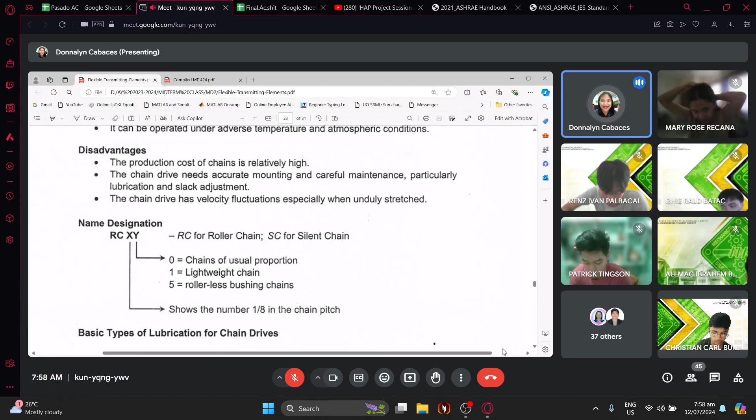So, yung first digit, kung 2 digit lang sila, or first 2 digits, kung 3 digits, refers to the number of 1/8 inch in the pitch, and 0, 1, 5 refers to chains of usual proportion, lightweight chain, rollerless bushing chain, respectively. So, ayan po yung ating roller chain designation.

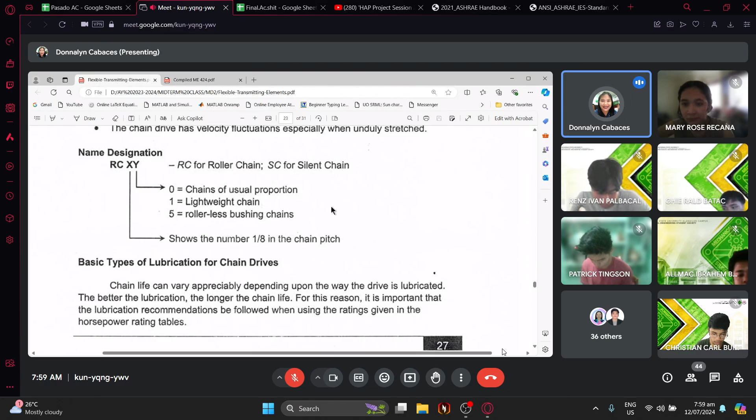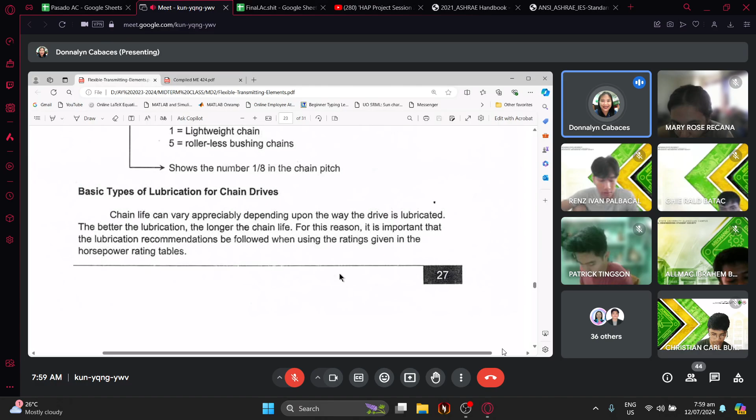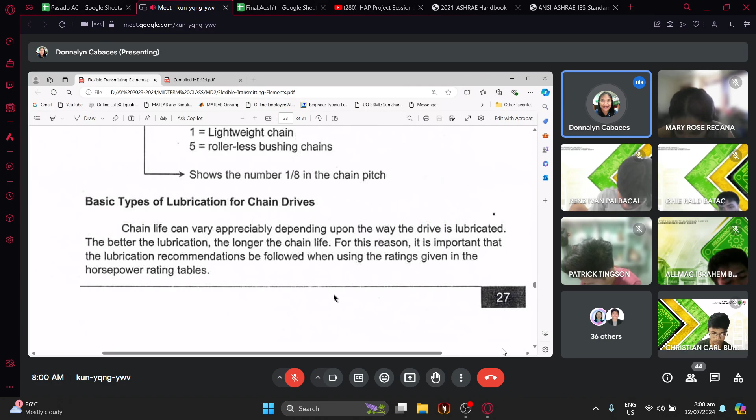Basic types of lubrication. So, minention natin kanina yung type A, type B, type C. Chain life can vary appreciably depending upon the way the drive is lubricated. The better the lubrication, the longer the chain life. So for this reason, it is important that lubrication recommendations be followed when using the ratings given in the horsepower rating tables. Now, ito yung mga type ng lubrication, yung kanilang explanation.

So yung type A again is manual or drip lubrication. Huwag basta lang type A ang ilalagay, type B, type C. Ilagay nyo kung ano ba yung tawag. So for manual lubrication, oil is applied copiously with a brush or spout cans at least once every 8 hours of operation. Volume and frequency should be sufficient to prevent overheating of the chain or discoloration in the chain joints. So again, using brush or spout cans.

For drip lubrication naman, from the word drip, so oil drops are directed between the link plate edges from a drip lubricator. The volume and frequency should be sufficient to prevent discoloration of lubricant in the chain joints. Precaution must be taken against misdirection of the drops by windage. Now, since dripping siya, sabi dito, precaution must be taken against misdirection. Baka mamaya, hindi doon sa dapat nating paglagyan siya mag-drip. No? By windage.

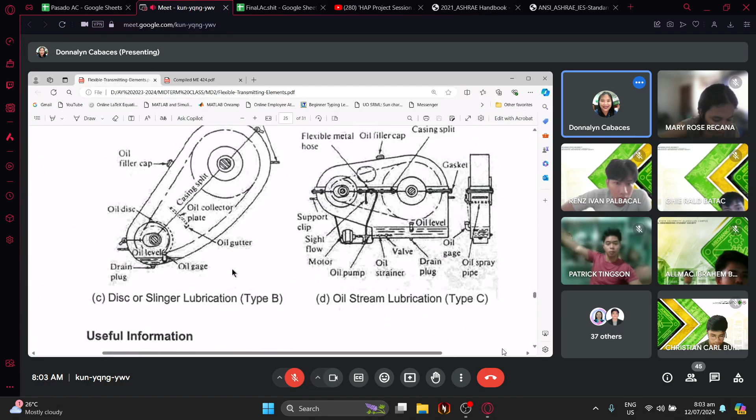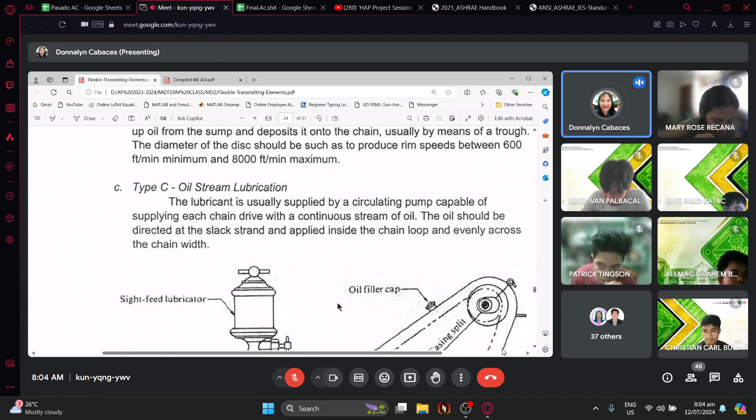And the third one is yung ating oil stream lubrication. The lubricant is usually supplied by a circulating pump capable of supplying each chain drive with a continuous stream of oil. The oil should be directed at the slack strand and applied inside the chain loop and evenly across the chain width. So, yun naman yung oil stream.

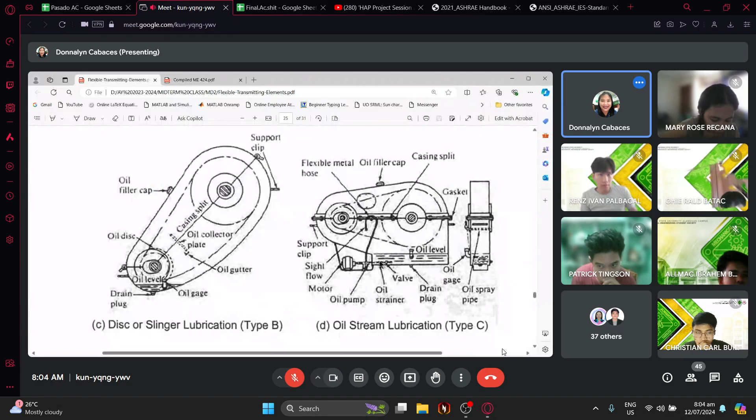Okay, so yun ang tatlong type ng lubrication. Type A, Type B, and Type C lubrication.

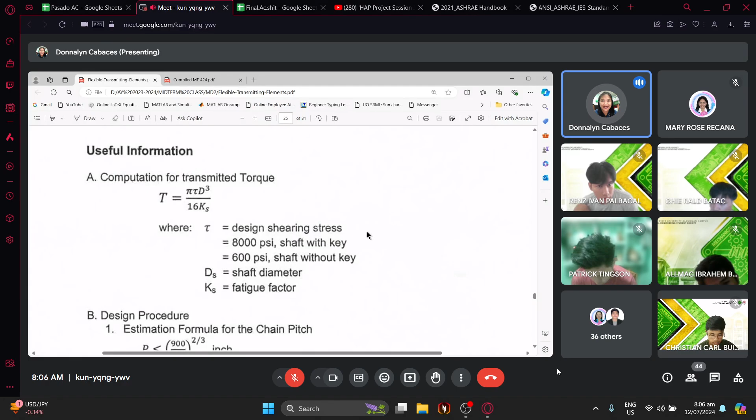Now take note that your design shearing stress, if not given in the problem, you may make use of 8,000 psi for shaft with key. Shaft without key, this is 6,000, not 8,000, not 600. Kinorek mo yun? 6,000 yun. I-take note nyo ha, ito ay 6,000 kapag without key. And then DS is the shaft diameter, and KS is the fatigue factor.

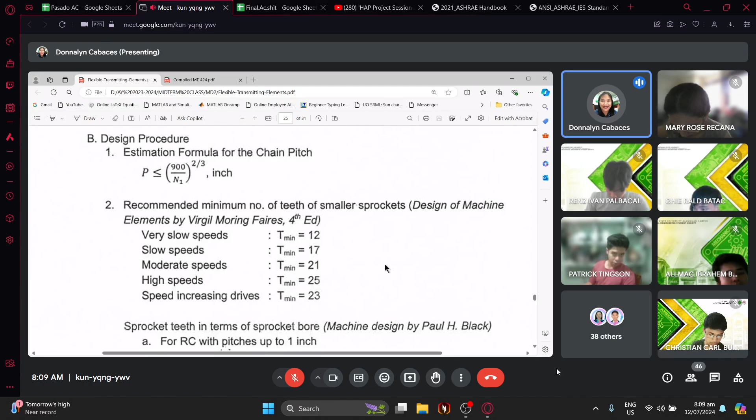These are actually recommended minimum number of teeth according to the book Design of Machine Elements authored by Virgil Moring Faires. So for very low speed, you can make use of 12, slow speed 17, moderate speed 21, high speeds 25, speed increasing drives 23. That is the minimum number of teeth of the smaller sprocket. Please take note of this, take a screenshot at inyong sauluhin.

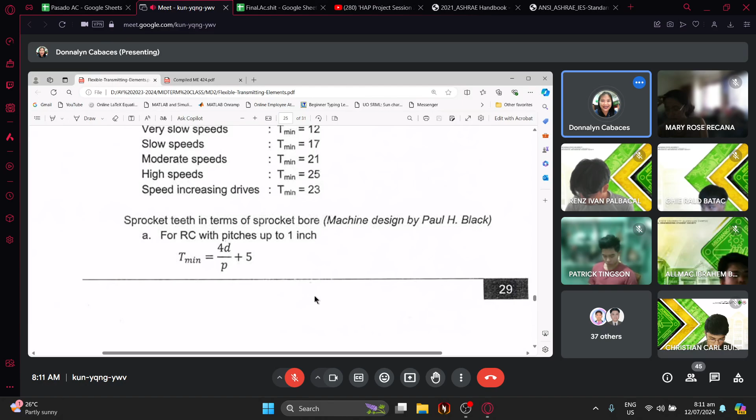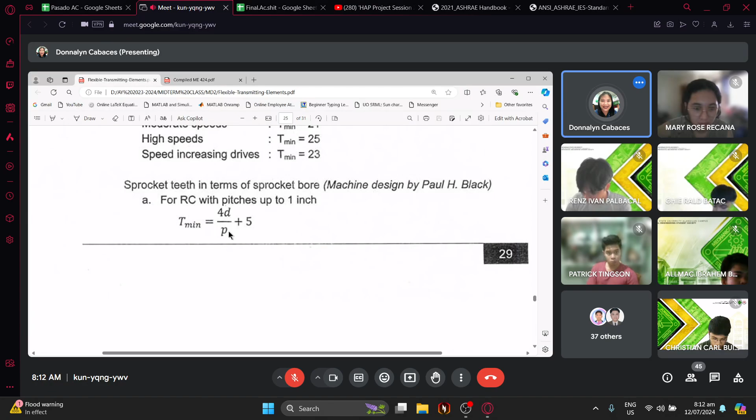For RC with pitches 1 and 1/4 to 2 and 1/2, the formula is 4D over P plus 4. Kanina ay plus 5, doon lang naman magkakaiba sa naka-plus. 4D over P plus 5 for that one, and this is 4D over P plus 4. And for silent chains or SC instead of roller chain, you have 4D over P plus 6.

And for the larger sprocket, in order for us to determine the number of teeth, the minimum number of teeth, dapat daw ay odd number. So for the larger sprocket, hindi gagamitin lang natin yung ating relation ng number of teeth at saka ng RPM. Ang T dito ay number of teeth at ang N natin ay speed o yung RPM. So T1 N1 is equal to T2 N2. From that equation, you can find the number of teeth of the gear or the driven speed.

Number 3, computation of pitch diameter and outside diameter. Pitch diameter, ito nakita na natin kanina, sa kabila ay over N lang ito, but again it refers to the number of teeth. So kung ayaw nyong malito, do not memorize the letter, memorize yung number of teeth. So DP is the pitch diameter, sorry, P is the pitch, DP is pitch diameter. P is pitch divided by sine of 180 divided by the number of teeth.

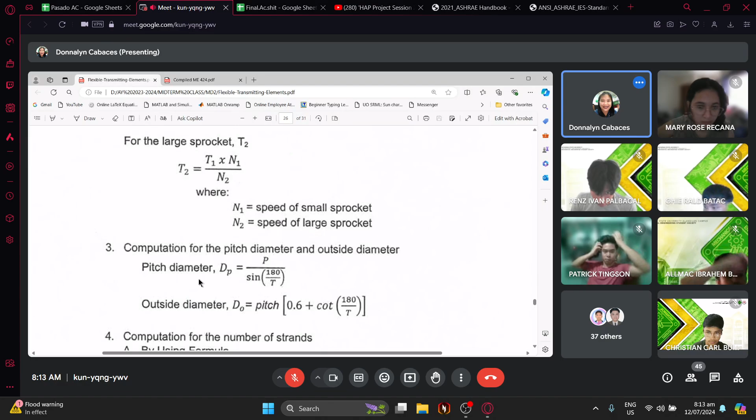Next, computation for the number of strands. Kagaya din ito ng formula natin dati sa belt. Formula or procedure number 5: number of strands is design horsepower over HP per strand. Yun ang ating formula, diba? Pareho din lang, ang design HP ay transmitted HP times the service factor.

Now, the horsepower per strand, for link plate fatigue, you have this empirical formula: 0.004 times the number of teeth raised to 1.08 times the RPM raised to 0.9 times P raised to 3 minus 0.07 P, wherein P is the pitch. So, memorize this formula for link plate fatigue.

For roller bushing impact, you have this formula for the horsepower per strand: KR is equal to 100 T1 over N1 raised to 1.5 times pitch raised to 0.8, wherein the value of KR is equal to 29 for chain numbers 25 and 35. KR is 3.4 for chain number 41, and KR is 17 for chain number 40 to 240, except yung ating 41, kasi may nakadesignate sa kanya sa chain number 41.

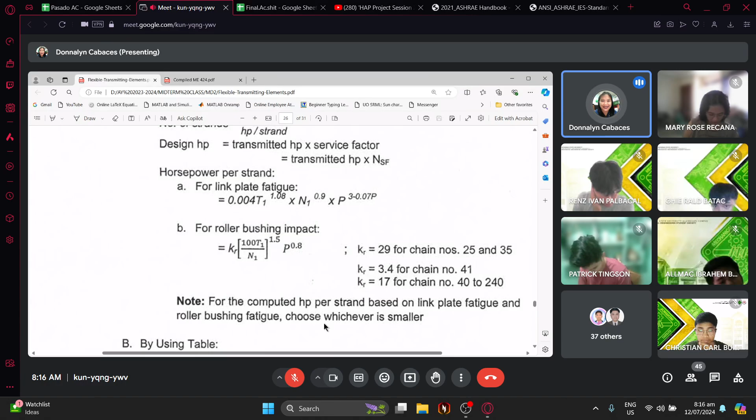For the computed HP per strand based on link plate fatigue and roller bushing fatigue, choose whichever is smaller. Now, that is using yung ating formula ng horsepower per strand, kasi nga hindi natin alam kung ano yung roller chain number, so hindi tayo pwedeng tumingin doon sa table na pinakita natin kanina.

Now, by using table, your HP per strand is the design HP over the multiple strand factor. Alin yung multiple strand factor? Yan yung 1.7 kung 2 strands, 2.5 kung 3 strands, at 3.3 kung 4 strands. Note, assume different number of strands so that the horsepower rating on ACA tables, ACA is yung sa manufacturer, is greater than the computed HP per strand. Sabi, dapat daw yung horsepower rating natin sa table ay mas malaki kaysa sa doon sa makukompute natin.

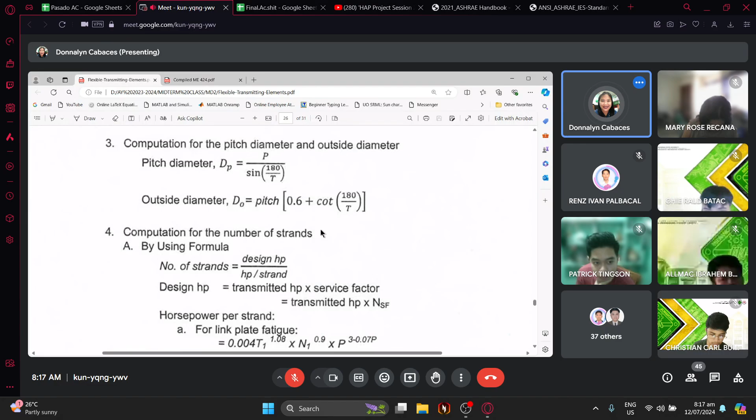Okay, so kailangan natin ding i-compare siya sa table. Paano nga ho natin i-compare? Hindi nga ho natin alam. Hindi din sa number 1, makukuha natin ang pitch doon sa ating formula.

Yung P ay equal to 900 over N1, or less than or equal to 900 over N1 raised to 2/3. Pag na-say natin dyan ang pitch, halimbawa sabi ko kanina ay 0.75. O di alam natin na siya ay RC60, kasi ang 0.75 ay 6 over 8. Ang gagawin mo, 0.75 divide sa 1/8, edi yun ang sagot, yung 6. O di 60 siya, doon mo i-compare ngayon sa makikita natin sa table para sa RC60.

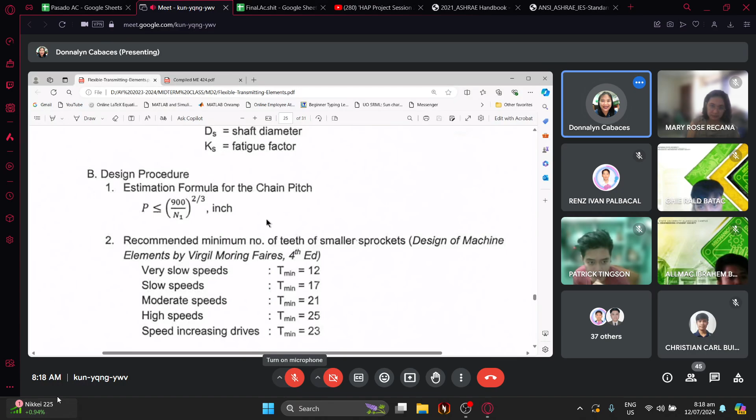Para natin ma-check kung tama yung ginamit natin na pitch dito sa unahan at yung pinili natin na RC number, ito yung pagbabasihan natin yung nakanote dito.

That after assuming the different number of strands, halimbawa dinesign natin, single strand. Try natin, divide natin ng, o assume natin na 2 strands. So, divide natin siya ng 2 ng 1.7. O anong value? O try natin uli, divide naman natin ng 2.5, or divide natin ng 3.3. Alin kaya doon ang papasok dito sa sinasabi na the horsepower rating on the table is greater than the computed HP per strand? No? So, titingnan natin ito sa ating sample problem.

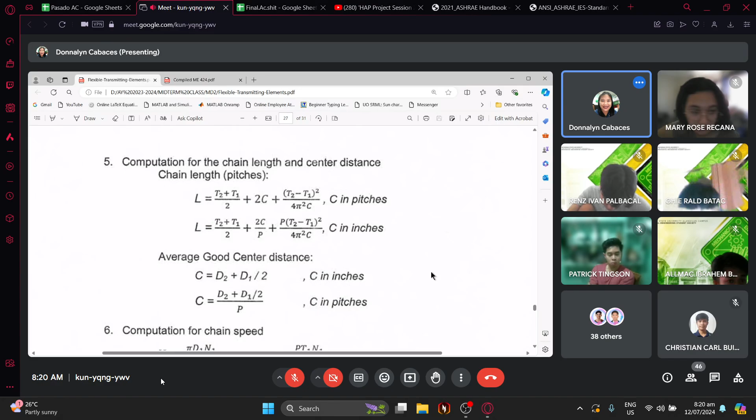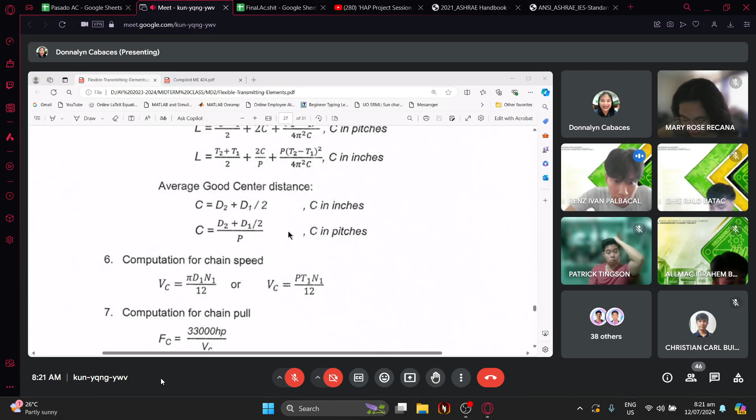Merong tanong, clarifications? Okay wala, hearing none. Okay yes go ahead. Ma'am, yung D1 lang po ang naka-divide sa 2? Mm-mm, mm-mm, okay po ma'am, thank you po, yung D1 lang ang nakadivide sa...

Okay, punta tayo sa computation for chain speed. So ito yung ating chain speed, hindi naman ito bago sa inyo, ha. Pi D1N1 over 12. Okay, or pwede rin daw itong gamitin natin: pitch times the number of teeth times N1 over 12. But basically you can use this one, pero kung walang given na D, ito ang gamitin natin.

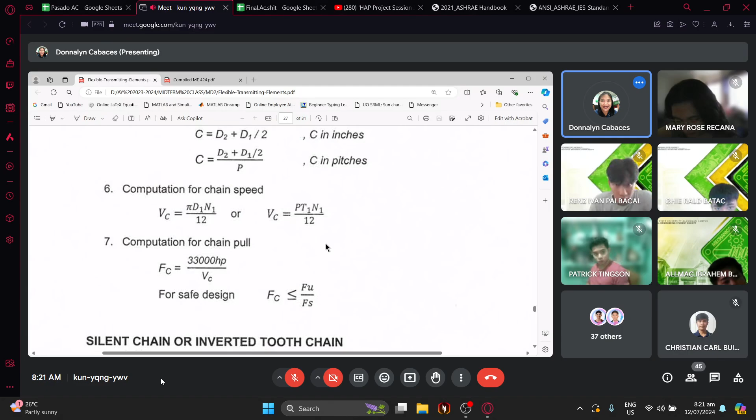Computation for chain pull, FC. Chain pull is 33,000 HP over VC. Saan to nanggaling? Di ba galing lang ito sa formula ng power, power is F times V. So yung 33,000 yan ay conversion factor lang para sa mga unit analysis. But basically, that F is taken from the formula ng power, so power is F times V, therefore F is power over V.

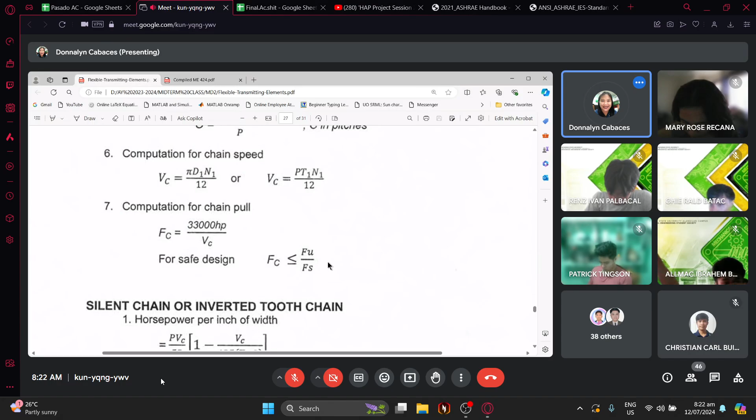For safe design, your FC should be less than or equal to the ultimate strength divided by the factor of safety. Sinali mo pa ang silent chain?

Okay, ito namang sunod na part ay para sa silent chain or inverted tooth chain. Yung mga nasa unahang discussion natin ay para sa roller chain. So kung silent chain, ito yung ating formula para sa horsepower per inch of width: P times VC, that is the pitch times the chain speed, divided by 53 times 1 minus VC over 425 times the number of teeth minus 8.

Ma'am, alin po yung ano niyan, yung P sa ano po ba, sa driver ba o sa driven? E di kung ang isang ginamit mo ay sa driver, di lahat ay pang driver. Again, this is empirical formula, they are obtained through series of experiments by authors of this empirical formula.

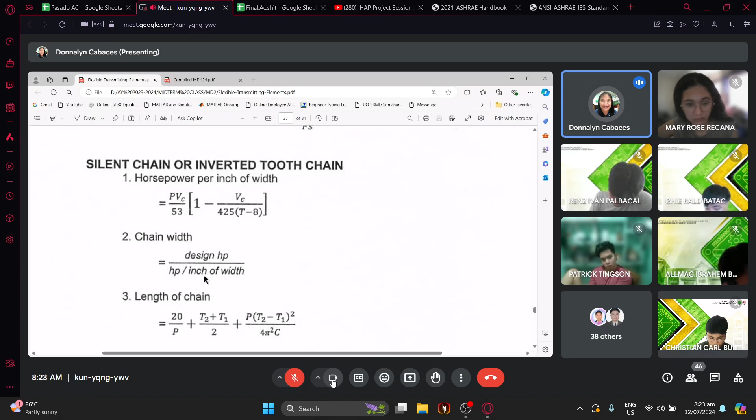Now, the chain width is design HP over HP per inch of width. So yung design HP, divide lang natin yung ating makuha dito sa number 1 para sa width, kasi naka-HP per inch of width yung ating formula sa number 1.

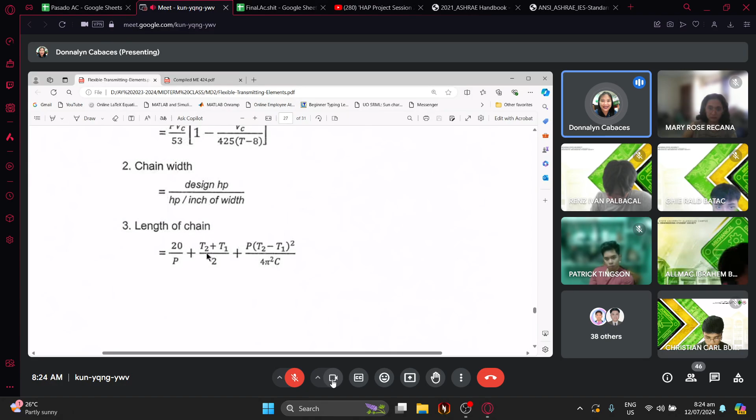Then you have the length of chain, so you have different formula: 20 over P plus T2 plus T1 all over 2 plus T, plus P times T2 minus T1 quantity squared over 4 pi squared times the center distance. Where P is the pitch, T are the number of teeth, and C is the center distance. Yun naman ang gagamitin na formula.

Ayan, tapos na. Nasaan ang problem? Ay, sinan mo sa akin. Problem. Meron tayong tanong?

Meron po tayong tanong? None so far. Okay, so punta tayo sa practice problem. Wait lang. Hindi yan, wala. Anong problem? Wait lang ha, hanapin ko lang yung ating sample problem.

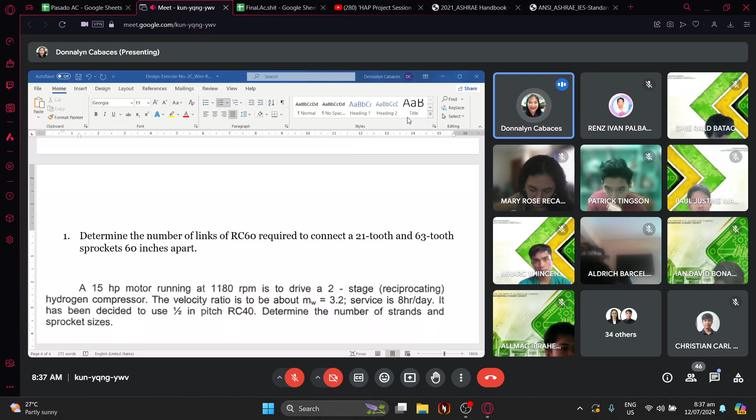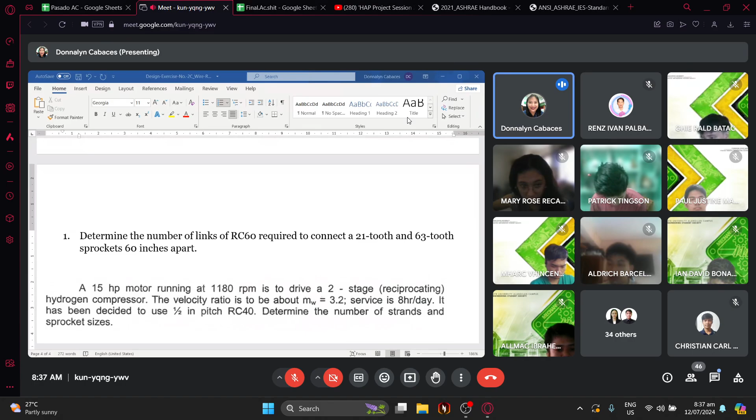Okay, ayan, tingnan nyo, very simple lang yung ating sample problem. Yun yung mga pwede nating pagkamalian pag tayo ay nag-design. So take note that we have to use even, no? 204, kung hindi mo pwedeng 202, mas okay na ang gamitin natin is yung next higher kasi pwede naman nating i-adjust yung center distance, di ba? Pwede nating iusod ng konti yung ating isang shaft, position ng isang shaft, para ma-adjust yung center distance. So we just use the next higher value. So ang answer natin should be 204 pitches. Okay, yun lang, simpleng problem lang.

Number 2 tayo, ito yung number 2. 15, wait lang ha, ako pala yung mag-screenshot muna. Nakalimutan ko na mag-screenshot, baka sabihin wala tayong ano.

Ay nga pala ha, Miss Mary Rose, next Monday kung andito kayo sa school, o basta kayo nandito, ikuhanin nyo na lang kay Sir Joel din, pasuyo na lang. Pakipirma nung lahat ng umattend sa atin ngayon. Lahat naman umattend kasi 46 tayo. O kulang pala ng isa, dapat 47 di ba? Kasi meron akong nakapresent, ganun nga ba yun? Kabilang ba ako? Isa pa yung presentation. Tama po ma'am, may kulang pong isa. Sino ang isa nito? Na-monitor mo ba kung sinong kulang? Is po ma'am, pero nagpaalam naman po, kasama po ngayon ng iba po naming kaklase, hindi lang daw po makakonnect po sa internet.

Okay, sige, ito yung ating problem. Try to read and analyze the problem. Analyze yung given, then let us see paano ninyo ito sosolvein kapag ito yung ating problem.

So, a 15 horsepower motor running at 1,180 RPM is to drive a two-stage reciprocating hydrogen compressor. The velocity ratio is about 3.2. Service is 8 hours per day. It has been decided to use 1/2 inch pitch RC40. Kahit hindi ibinigay sana yung pitch, no, alam natin na kung RC40, ang pitch ay 1/2, coming from 4 times 1/8. Determine the number of strands and sprocket sizes.

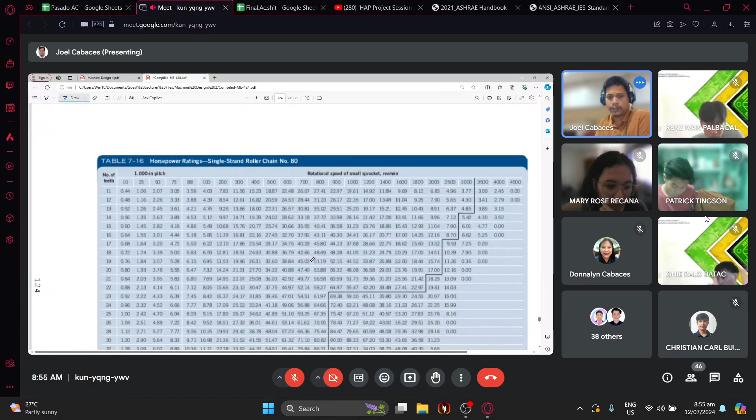So sa ating problem, binigay na yung RPM, ito yung kailangan natin, di ba? Yung speed or rotational speed ng small sprocket o yung ating driving sprocket. So binigay yung 1,180. So nandito naman ay 1,200. So ano pang kailangan natin dito? So kailangan natin dito ng number of teeth. And we don't have that number of teeth. Okay? So anong gagawin natin dyan kung hindi natin alam yung number of teeth? So diyan papasok yung ating mga assumption.

Mag-a-assume tayo. So for our assumption, we will assume that the small sprocket has moderate speed. So we can use the recommended number of teeth of the small sprocket for moderate speed. Ano yung recommended number of teeth of the small sprocket for moderate speed sa inyong manual? Twenty-one. So that will be our T1. For recommended number of teeth, yung T min, the minimum number of teeth, which is 21 teeth. So pwede natin gamitin siya doon sa ating table. Puntahan natin yung table natin.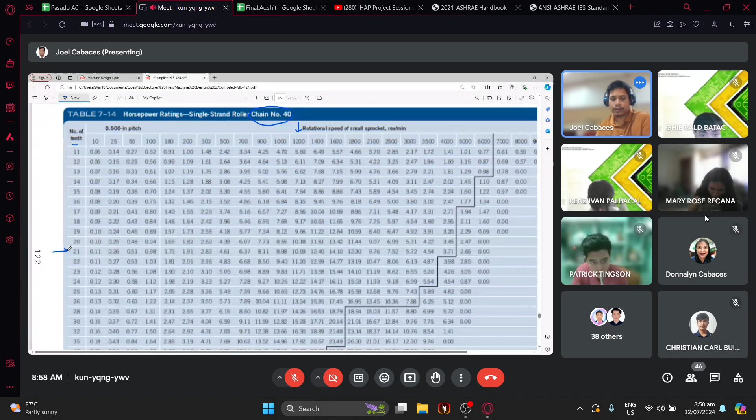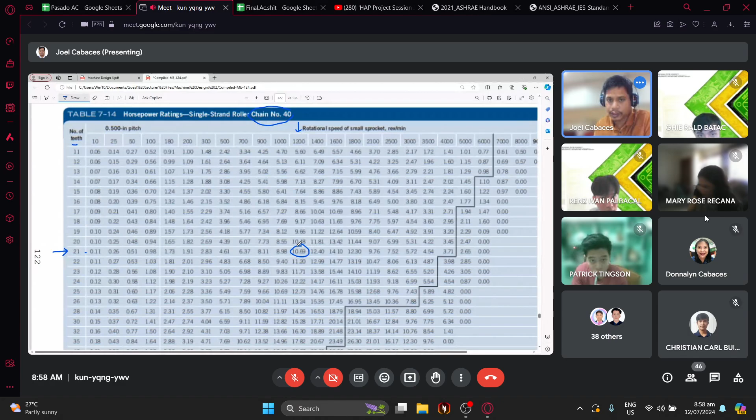Okay. So this is our table for RC number 40. It's only applicable for RC 40. So we have 1,200 dito. And yung 21 teeth. Kukunin lang natin yung katapat niya dito. So ito ay around 10.69. So kung mapapansin natin, wala tayong 1,180 mismo dito sa ating RPM, sa ating rotational speed. So kung gusto nyo, pwede kayo mag-interpolation para makuha natin yung 1,180 equivalent horsepower per strand. So makukuha natin dito is the horsepower per strand.

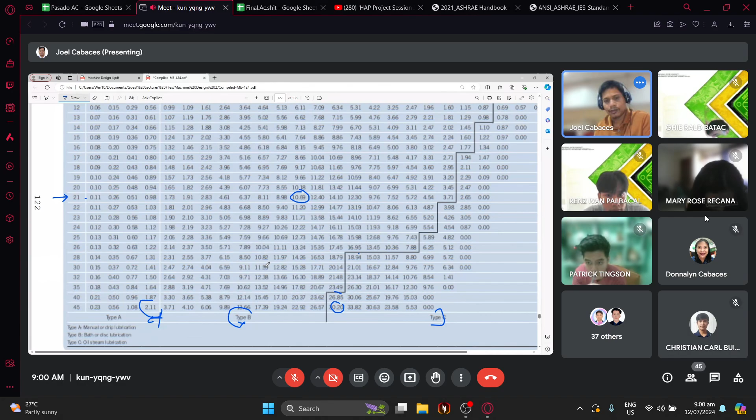So pwede rin itanong, halimbawa dito yung type, pumatak siya sa type B. Pwede rin siyang itanong sa problem. Type B siya kasi pumatak siya doon sa portion ng type B. So pag pumatak dito sa portion na may guhit, type C naman siya. Kung 30.2 yung ating horsepower per strand, type C siya. Halimbawa, 2.11, dito pumatak, type A naman siya. Although hindi siya tinatanong sa problem, additional info lang. Baka sa susunod na exam itanong kung anong type ng lubrication ang applicable sa inyong setup.

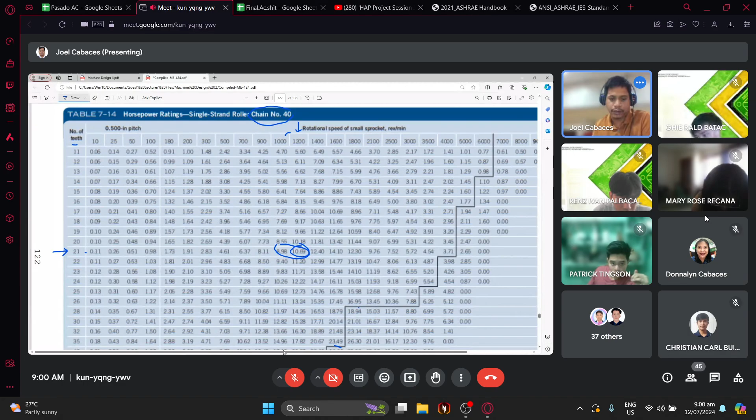So kung gusto niyo mag-interpolate, i-interpolate nyo. Anyone pwede i-interpolate to? Pwede rin naman hindi na, kasi ito ay gagamitin lang natin for comparison. Maliwanag ba? May question? Maliwanag po, sir. Okay. Hindi siya kailangan na eksaktong-eksakto. At least in-between siya sa 8.98 and 10.69. Let's say this is 10.69. So from the table, lagay natin dito sa ating presentation. So alam nang gumamit ng table, ha? Pag hindi natin alam gumamit ng table, mahihirapan.

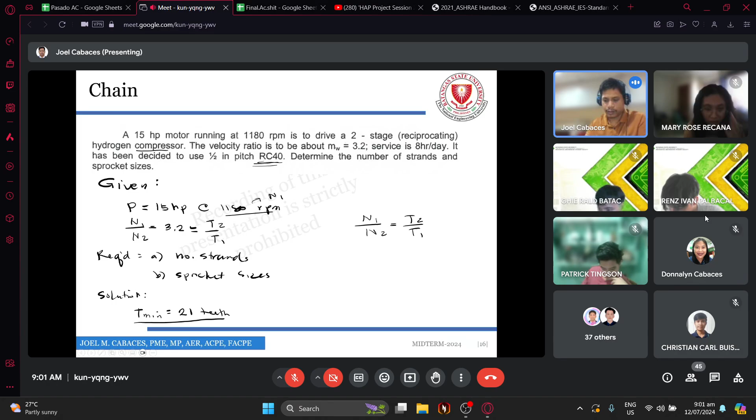From table, sa 7.14 ng inyong manual. So horsepower per strand is approximately equal to 10.69 horsepower per strand. So this is the rated horsepower ng RC 40 at 1,180 RPM with 21 teeth sprocket. Okay? So this is the rated.

So ngayon, susolve naman natin, ano ba yung kailangan natin doon sa ating setup? So first, how we can calculate the horsepower per strand. Pwede natin gamitin by formula or by using table. Hindi na tayo sa by formula, sa by using table na lang, kasi ang ginamit natin is table. So to get the horsepower per strand, ang kailangan natin is yung design horsepower over the multiple strand factor.